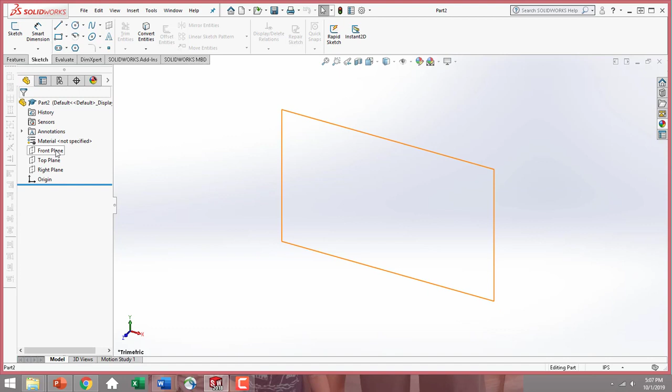So to begin, go ahead and open a new part document. Make sure your part window is in inches. Our instructions say we only need a 2D sketch, so we're not going to create an extrude feature from this. We're just sketching it. But we do need a sketch on the front plane. So go ahead and select that front plane and bring it normal to. Remember, always bring your planes normal to you so you're looking and sketching perpendicular to the plane.

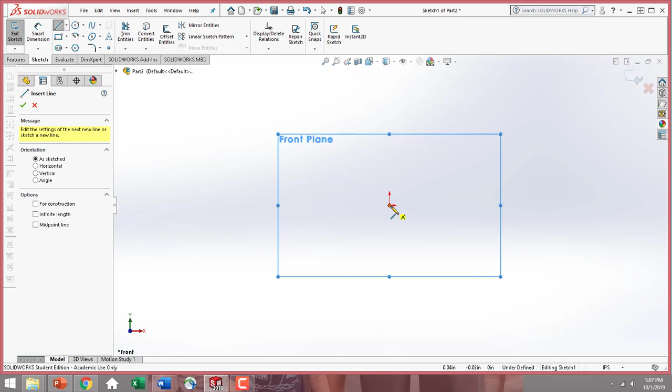Go ahead and open a new sketch, and I'm going to just select the line segment. Remember to always sketch from your origin so you are connected to a point in space. So I'm going to begin by just sketching a straight line here. Then I want a tangent arc. Instead of selecting a new sketch icon, I'm just going to do the shorthand. So bring my line segment back to that endpoint and then around, and I get that nice tangent arc.

I have another straight line up here, and then I need one more tangent arc, and then I'm going to stop with the sketch. Make sure they are going in the directions that you want. They don't need to be perfect at this point though. Now I'm going to go back to my line segment. So I just made the basic outline sketch of the top of that handle. So go back to your line segment, click down.

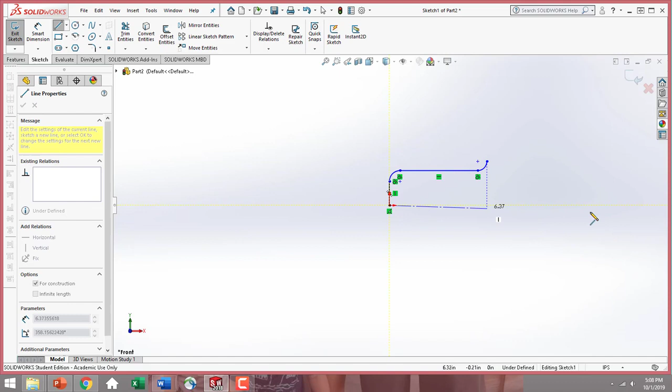Instead of selecting the line that we've been using, this would be referred to as an object line. It gives us these nice solid lines and creates our actual sketch. We're going to select center line. You'll notice when I place it down, I'm going to just connect it to my origin and bring it straight out, kind of to here, because I'm going to utilize the endpoint of it later on. But you'll notice that it has just dashes. This is our center line or construction line that we can use as a reference point.

Having it within our sketch is not going to affect any of our sketch relationships, or if we wanted to extrude this part, it wouldn't affect any of those features either. Whereas if we were just using that solid line that I used to outline this top of the handle and the rest of the part, the object line, if we put it in the center and then try to create an extrude feature from it, we would have a problem because we would have intersecting contours then, a sketch within a sketch, which you cannot have.

So when you need a reference point or reference geometry, you always want to use your construction lines or center lines because you can reference dimensions from them and how other lines lay and add in relationships, but they don't affect the overall feature or design of the part.

So once we have our basic beginning outline and our center line, make sure that you have all these relationships that are showing up. So you should be connected to your origin, so have a coincident relationship from the endpoint of one of your lines. It doesn't have to be your straight vertical line. That line should be vertical.

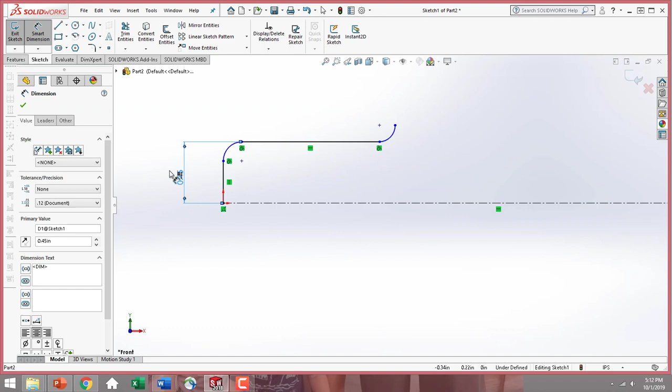If you want them to, you can come over here on your Dimensions tab, go to Leaders, you can do a custom position and change that so they are lining up correctly. You can change how your leaders are displayed, but we'll get more into that when we start doing our drawing and documents.

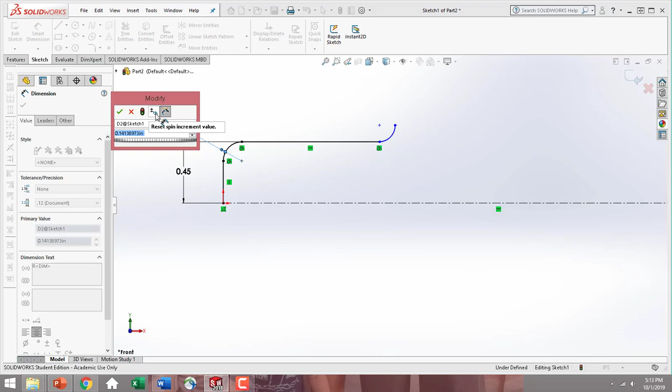Next, I'm going to dimension this top arc, which I can read from the shorthand 2 times the radius of 0.22, that both my arcs here are going to be the same, so it's going to be 0.22. So this bottom arc that will eventually be here will have the same radius. Then my inner arc right here has the radius of 0.15.

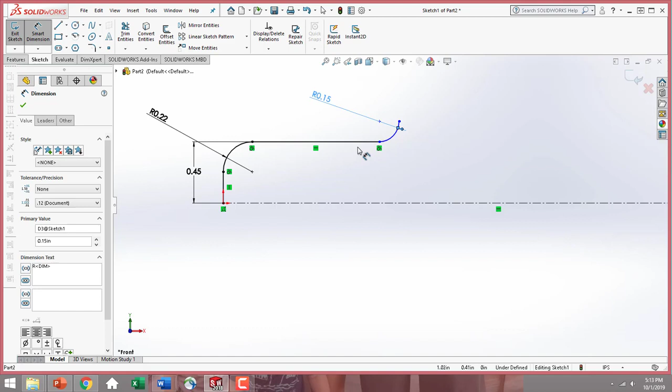So far I've just dimensioned what I have sketched. So I'm going to come up here to my circle sketch icon. I'm just going to place 2 circles. Make sure your midpoint is on that center line just so you don't have to add in another relationship because we're attached there. I'm going to add in one relationship where I hold the control key down, select both my circles, and have them be equal to each other. So now I only have to dimension one. So I'm going to smart dimension. The diameter of these circles are 0.60.

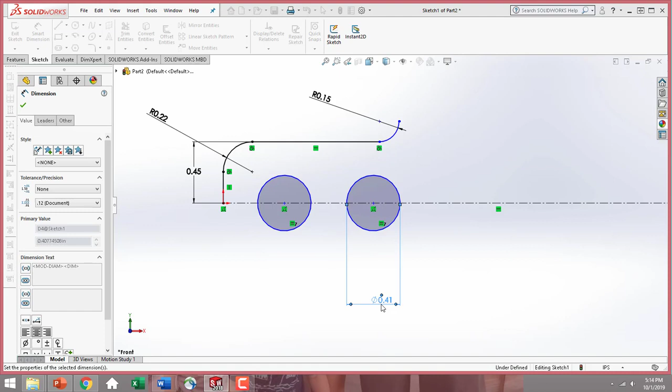Next, I'm going to dimension from the midpoint to the end line segment. This gives me that dimension of 0.60 as well. The midpoint to this end line segment is that 1.5. I'm going to hit OK.

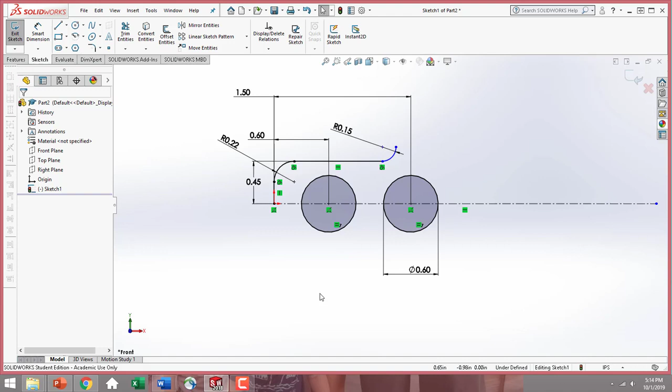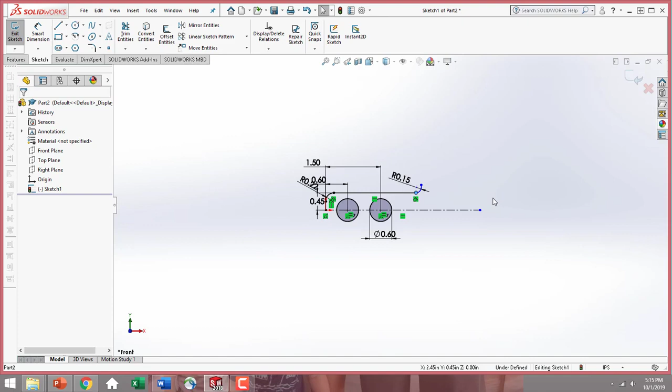Since I know that this line segment comes out further, I'm going to just drag it out. If your curve gets too crazy, you can just bring it back around. It's not a huge deal right now. So far we're looking pretty good. I'm just going to zoom out so we can see a little better because now I'm going to start adding in my arcs.

Okay, so we technically have 4 arcs. You can see this tangent curve. It kind of looks like it goes into a straight line, but then in our drawing we see another arc right about here in the end of that handle. That is just showing that we're actually using a center point arc right here. So this tangent line goes into a center point arc and then tangents around. So I'm going to add in all my center point arcs right now.

So go to your arc icon, go to center point arc. Now you can see when you're choosing your arc type, it shows you what points you're going to list first. So we're going to select where we want our midpoint and then our 2 endpoints. So in this picture of your homework, all your radius and other dimensions are calling out your midpoint, which appears to be about right here in between your 2 circles. So I'm just going to select that down.

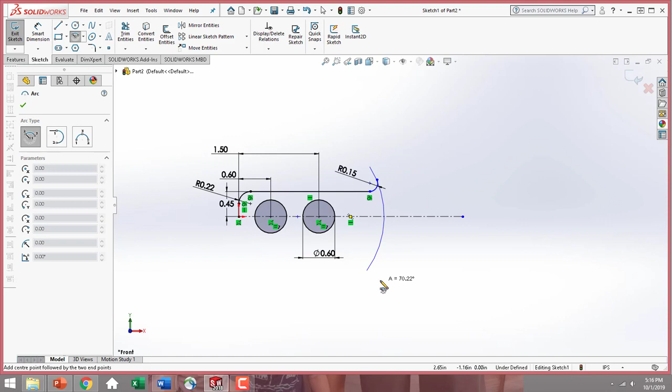Now I'm going to start with just this first line segment. So I think it's about right here, and then it's going to come around. So that's that arc I was talking about that kind of looks like a straight line. Now our second line segment, I'm going to go back to that midpoint and I'm going to use this for my midpoint on all the arcs. So now this is going to be the bottom arc on this interior cut. Once again, go back to that midpoint. This is going to be the top arc on that interior cut.

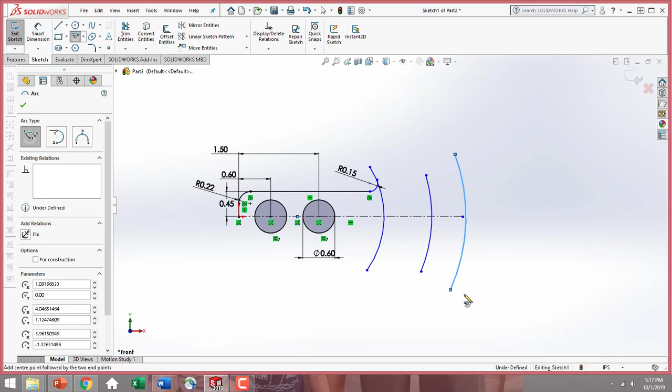And last, go back to that midpoint, and this is going to be the top of our guide support. See how it wants to go backwards? You want to make sure that you're coming in the right direction. And hit OK. So now we have all of those arcs. So make sure your midpoint is coincident with your center line, which it is.

Now we want to make sure all of our midpoints for these arcs are coincident with that line as well. So just hover over where you think they're going to be. SOLIDWORKS will automatically have them pop up. Hold down Control, select that center line and hit coincident. Then hit OK. We're going to do that for all 4 of them. So go ahead, add in that relationship.

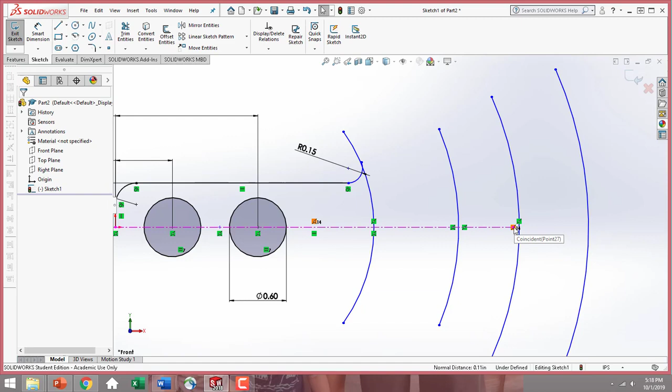You can drag out your center line if it is shorter than you want it to be. And for this one, I'm actually going to have the endpoint of my center line be the one that becomes the coincident relationship to the midpoint of this final arc.

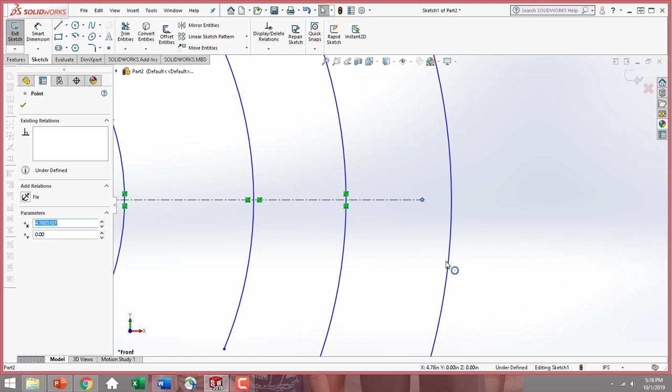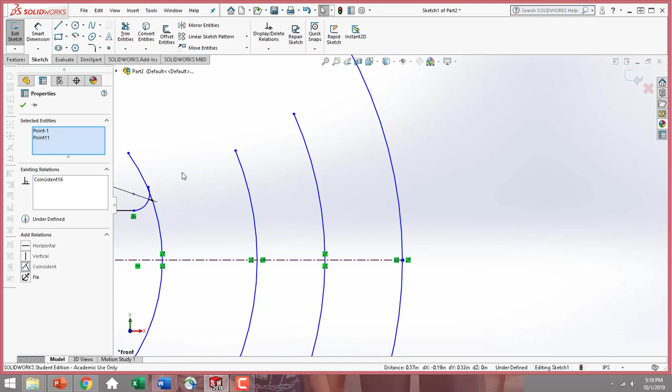Make sure you select the arc. I kind of have two arcs going on because I accidentally copied it, so make sure you don't do that. Select the midpoint, the endpoint of that center line, make them coincident, it snaps together. Just because it's cleaner, and now we can add in different relationships as well.

So we also want to connect the endpoint here to this bottom arc. So you can grab the endpoint and drag it and wait for that relationship to pop up, like SOLIDWORKS does. Hit OK, and now we don't have to add it in, but we are connected there.

Now you can come up to your Trim Entities tool. This is really handy for things like this where we needed an arc. So you can select the down arrow, go to Trim Entities. I'm going to use the Power Trim option. Then I'm just going to swipe through the line I want cut and hit OK. So it gets rid of that, but now I still have that nice arc coming up to my tangent line.

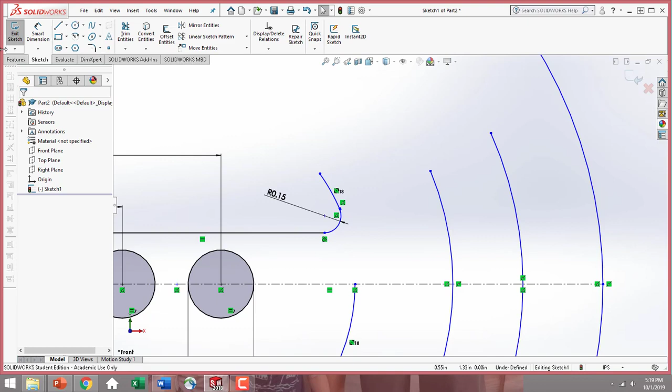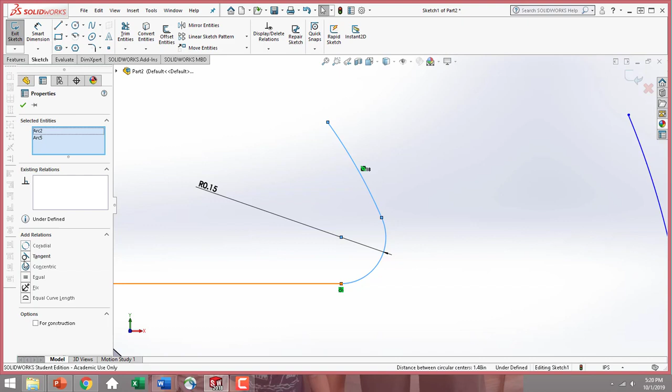I also want to make sure that my endpoints match up. So you can do that by zooming in, and that this arc has a tangent relationship to the arc we just cut. So add in that relationship as well. It's going to be tangent just so it always has that nice rounded curvature.

So you should have something that looks like this right now. Don't cut this line yet. So I'm hooked to my center line all the way through. I have all my arcs attached and everything's lining up nicely.

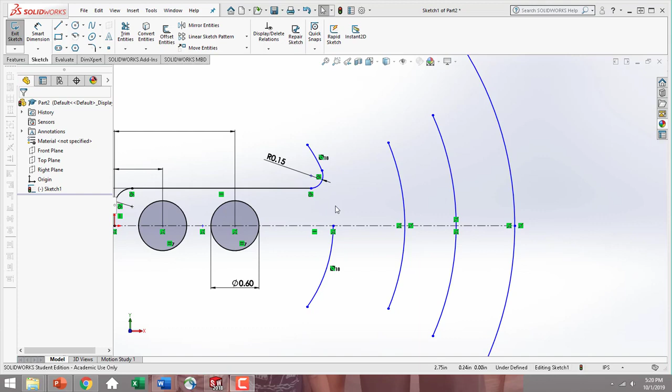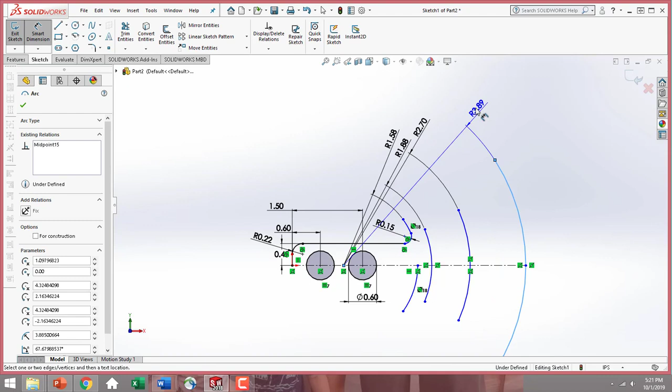Now let's go ahead and add in the dimensions of these arcs themselves. So I'm going to start with this bottom one. Its dimension is listed as 1.58. My middle is listed as 1.88. The top of that interior cut is 2.70. And then the final arc we have as 3.89, and hit OK. So now you can see everything's lined up neatly.

Go ahead and select all 5 of these arc lines now, since we already trimmed that away, and make them concentric to each other. So that means that spacing is always going to be equal, and hit OK.

Now I'm also going to add in one more construction line. So I'm just going to select my center line again. I'm going to draw it from that same midpoint I've been using. And this time I'm going to bring it up to about here, and just place it down. This is going to come into play when I finish up my interior and outside line segments, and how I'm going to put in that 30 degrees.

So let's go ahead and grab our line segment, and I'm going to start with the outside here. So hit that endpoint. Remember, we need another tangent arc here, so go back to the endpoint, create a tangent arc, then we have a straight line, then we have another tangent arc connecting them. Same thing with the bottom. We come from this arc we've already created, we have another tangent arc, a straight line, and then a tangent arc. And hit OK.

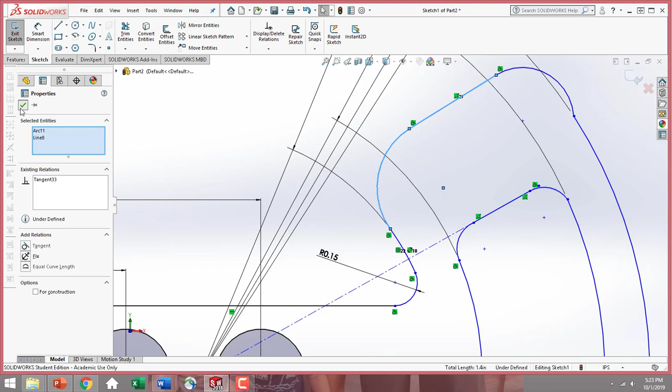So zoom in, and we're going to start on the outside. Make sure we have a tangent relationship on both sides of the arcs we just put in. So I need one on this side. So hold the Control key down, select both those line segments, select your tangent relationship. I'm going to get rid of this coincident relationship that SOLIDWORKS automatically put in. Sometimes we don't need the automatic ones. We don't want to have any that we're not really paying attention to because it will mess this part up.

Okay, I have a tangent relationship here. I need one on this end, so select both those arcs this time, hit tangent, and OK. So you can see that flows smoothly together. I need to do the same thing to these interior arcs. So I'm going to add in a tangent relationship here, and one between these two top arcs.

Now that I have this line sketched, I'm going to add in one more relationship. I'm going to select the solid line I have sketched here, hold down my Control key and select the center line. This time I'm going to select the collinear relationship, so those lines lie right on top of each other. You can also move your endpoint down to connect to this endpoint, just so you have a cleaner line.

I'm also going to add in a relationship between the outside straight line segment and my interior straight line segment for those two lines to be parallel with one another, and hit OK.

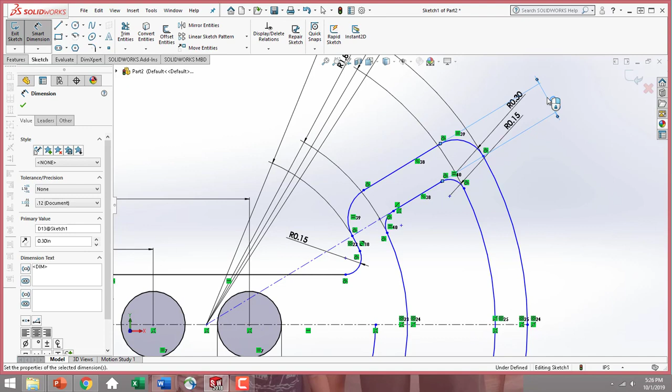Now I'm also going to smart dimension the width between these two line segments. Remember, you do need to make them parallel before creating this dimension, just so the dimension comes out straight and not at an angle, and is the true width. And this width is 0.30. You can read that on the bottom homework. Okay.

So you should be attached as well to that center line by the arc endpoint. So if it's not, you can select it, hold down control and select that center line, make the coincident relationship. I already have it connected, so it's saying I'm over defined.

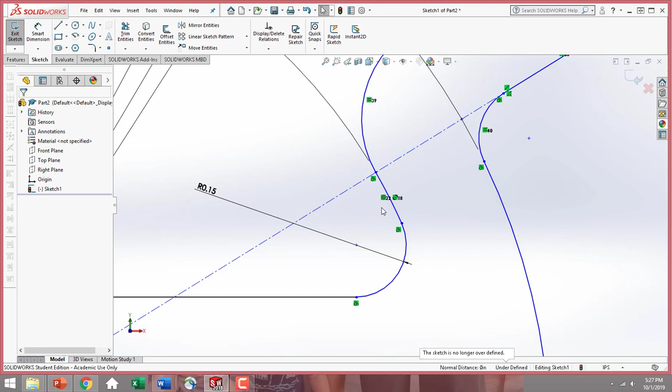So now we want to add in that 30 degrees, and that's where our two center lines are going to come into play. So go ahead and go back to your smart dimensions. Remember, when adding in an angle, you need to select the two line segments you want the angle in between. So select both of your center lines and drag that out. It's going to be 30 degrees and hit OK.

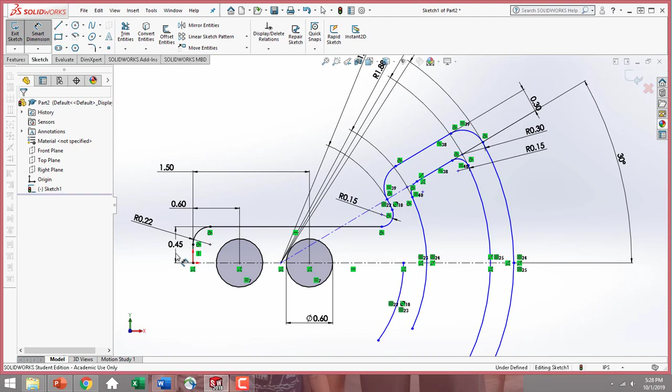So in the beginning, when we started dimensioning our circles in the first part of our handle, we left off that 1.12 dimension. Let's go ahead and add it in. So go back to Smart Dimension. You can zoom in. We're going to dimension the midpoint that we've been using for all of these arcs to the end line segment. Remember to select the line segment and not the midpoint of it, because you'll just be in trouble then. This dimension is 1.12.

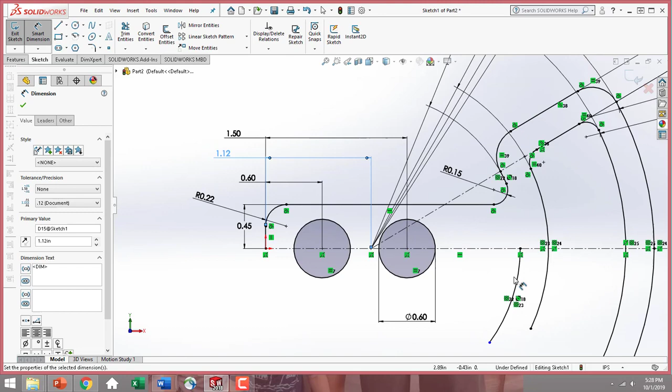And hit OK. So if you're reading from the left over on your homework, you'll see we have all the dimensions that have been given to us. By adding in that 1.12 dimension and giving my midpoint placement, the rest of my drawing has now become fully defined.

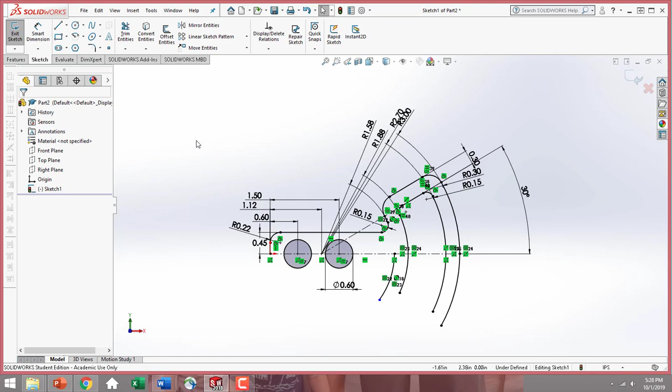So now the cool thing, we only had to draw one side and dimension it all. So let's go ahead and mirror it. So under your sketch tab, go to your mirror entities icon and work your way down on your property manager. So to begin with, what entities do you want to mirror? So I want to mirror this straight line, my arc. I'm just going to go around the whole outside of my part.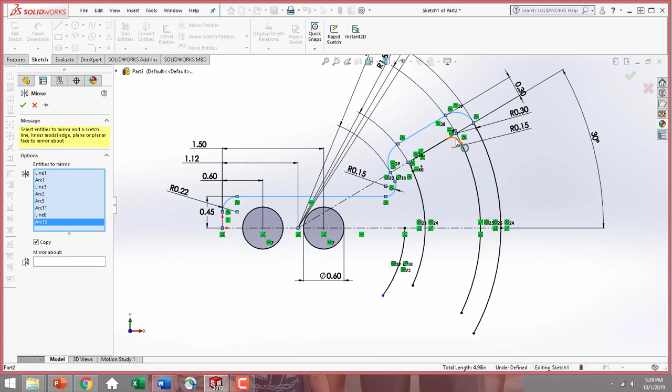I do not need to mirror this line, however, but you can if you'd like, because I do have it still here. I'm going to select it just so you guys can see. I don't need to select this outer line or this line because they both go to each side. I'm actually going to unselect that. So you can see I've just selected all these top outer lines besides the arcs I've already created.

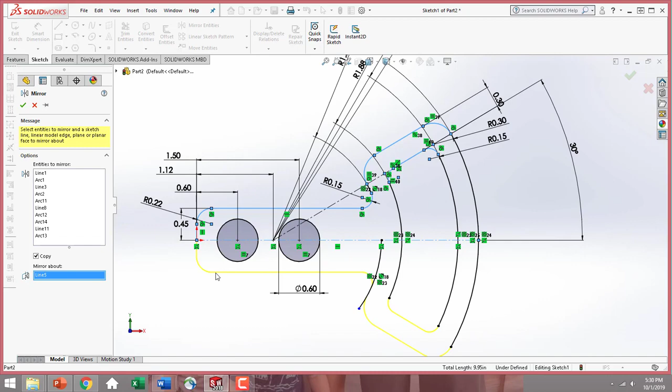Now mirror about. This is another point where your center line comes into play. So select your mirror about, select that center line. You'll see just a preview of where those lines are going to be and hit OK. Now you get all these crazy squares pop up for relationships. That's just showing that we did mirror those entities.

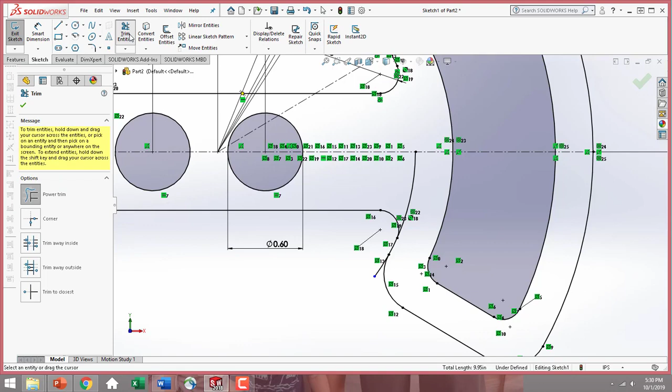So come back in because we do have these extra lines. Go to your trim entities icon, select it, make sure power trim's there, and just drag your mouse through these extra lines. And now we have a nice clear sketch that's fully defined. You can read on your status toolbar that it is fully defined.

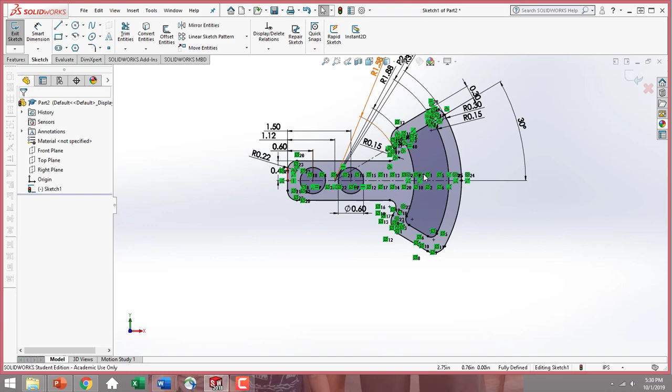There is nothing blue. If we were to create a feature, we could extrude this base, say 1/4 of an inch, and hit OK, and it looks just like our homework part.

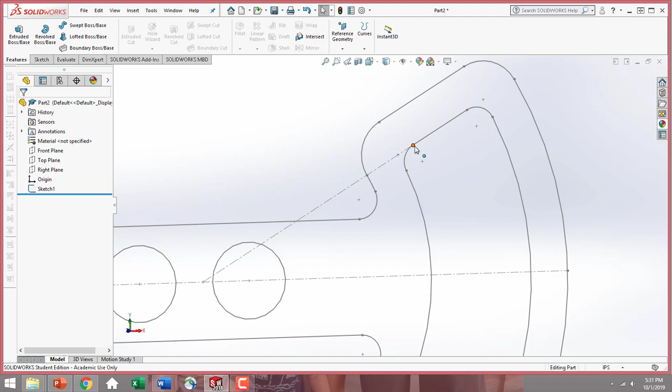Also, make these lines parallel to one another. Make sure that center line is attached to the endpoint of the first arc we put in, as well as the endpoint to this tangent line, because those also need to line up and have that 30-degree relationship too, to give it that symmetrical look.